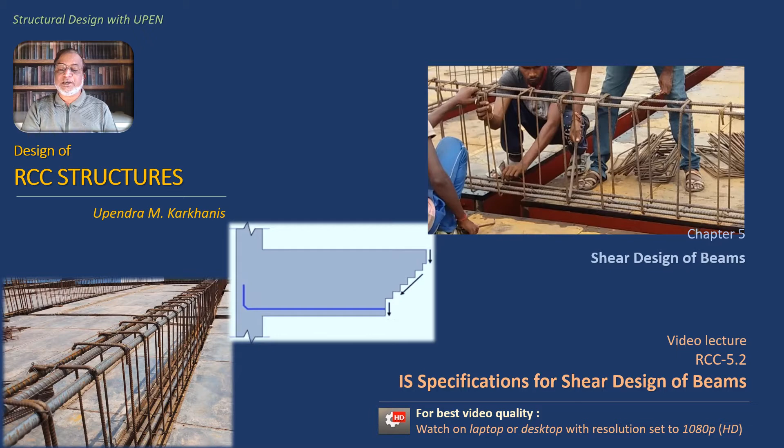The expected learning outcomes from this video lecture are: first, to check nominal shear stress for maximum shear stress; second, to state IS specifications regarding shear reinforcement.

The contents of this video lecture are: first, review of shear behavior of beams; second, critical section for shear; third, check for maximum shear stress; fourth, shear resistance of beams; fifth, reinforcement detailing and zones of shear stirrups.

We are going to use some key terms in this lecture: shear design, critical section for shear, nominal shear stress, maximum shear stress, shear resistance of beam, bent up bars, shear stirrups, minimum stirrups zone.

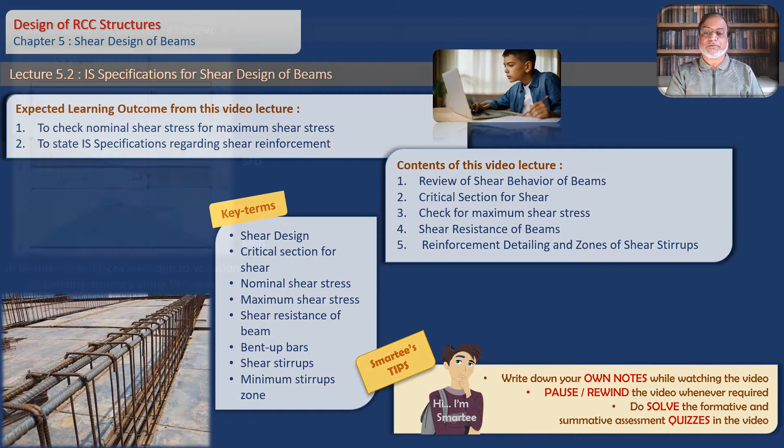Friends, in the earlier video we have already studied in detail the shear design of beams. In this slide, we will have a brief and quick review of the process of shear design of beams.

The first point is that in beams, shear forces arise due to variation in bending moment along the span. As seen in this diagram, there is a constant variation of bending moment, and that gives rise to the existence of shear force. We know that it is impossible to have a beam without a uniformly distributed load.

If we have a uniformly distributed load, we are bound to have variation in the bending moment along the span of the beam, because the beam has at least its own self weight, which is in the form of uniformly distributed load. It is not possible to get rid of the self weight, so it is not possible to have a beam without at least one uniformly distributed load.

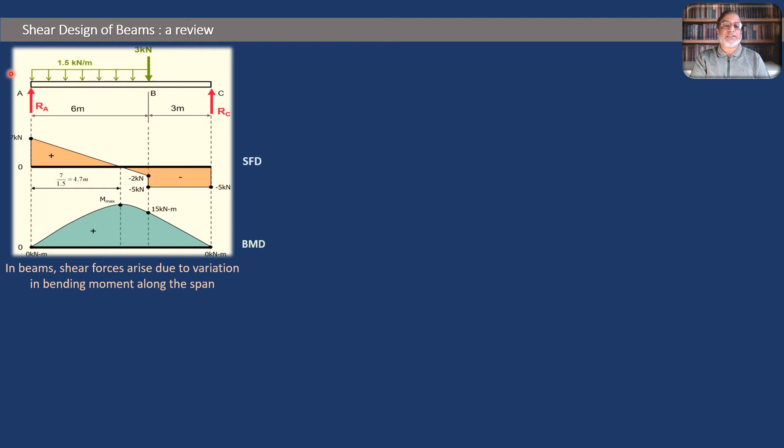This brings us to the fact that it is impossible to have a beam with pure bending. That means we must always be having some variation in bending, and that is why we will always have some shear force at every cross section. This makes it necessary to consider the behavior of beam in shear in greater detail.

Now we have seen in the last video that there is shear cracking, and we can divide the beam into three zones: 1, 2 and 3, and the shear cracking takes place differently in the three different zones. We know that the shear is critical or maximum near the supports. So zone 3 is critical for shear, just as zone 1 is critical for flexure.

So we have seen that at the support or near the support, we can get elements in pure shear as shown here. Element in pure shear means an element having no bending stresses, only shear stresses. Here the result of pure shear is that one diagonal is stretched, meaning we get tension along one diagonal of the element, as we get diagonal compression along the second diagonal. That is why the result of maximum or critical shear in the beam, usually at the supports, is that we get diagonal tension and diagonal compression in the member.

So here we see a picture of a real beam in which we see 45 degree inclined cracks arising from the support. So this was another point of review.

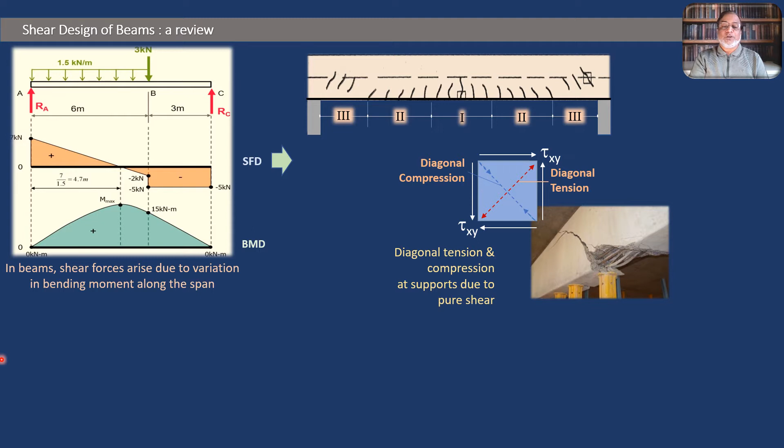Now we come to the fact of how to design a beam. So what is the meaning of design of a beam for shear? Here we make it explicit: design of beam for shear.

Shear design of beam involves making provision for shear resistance such that the shear resistance of the beam is more than the actual shear force, called design shear force VUD, developed at the critical section of the beam.

So what we are supposed to do is decide the critical section, the section at which the shear force is critical, and at that critical section we calculate the value of shear force that is called design shear force VUD.

So this VUD is calculated at the critical section, and in the process of design we are supposed to provide measures so that we develop a resistance in the beam equal to VUR. This VUR should be such that it is greater than VUD.

So if the resistance is greater than the actual shear force, we can say that the beam is safe in shear. So design of shear for beam is nothing but a handshake between the shear resistance VUR obtained from the design and the actual design shear force which is developed due to the loads.

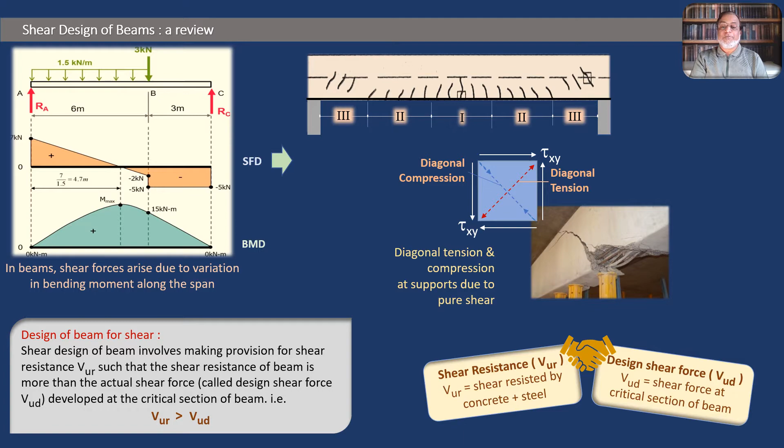Now the shear resistance of the beam will be derived from two factors or two sources: one is shear resisted by concrete, and second is shear resisted by steel. The greater detail of this fact will be studied further in this video.

Just as we saw in the previous slide, to design a beam for shear means to develop shear resistance in the beam, VUR, which is greater than the shear developed at the critical section, that is the design shear force. So first we have to know how much shear force is to be resisted. That value of shear force is the design shear force, VUD.

Now what is VUD? VUD is the shear force at the critical section. Here comes the concept of critical section. We know that in general shear force is maximum at the supports of the beam, so we should take the support shear directly as the critical section shear.

But IS 456-2000 gives us some allowances regarding deciding the design shear force. So the critical section may not always be this direct support section. Let us study in detail what the IS code says about the critical section.

Critical section for shear means the section in the beam at which the value of shear force is taken for design. That means you calculate the force VUD at a section called the critical section. The IS code further says when the reaction in the direction of applied shear introduces compression into the end region of the member, sections located at a distance less than D from the face of the support may be designed for the same shear as computed at distance D.

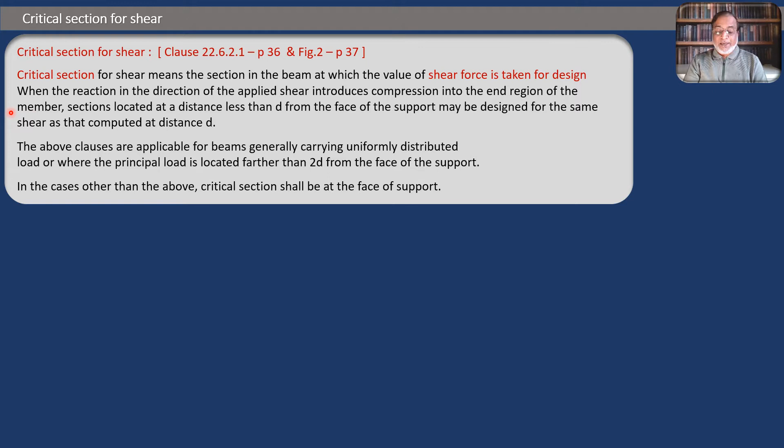Let us consider the situation here. This is a simply supported beam carrying UDL and having a column under the beam. Usually the columns will be under the beam; rarely they may be above the beam, but normally the columns will be under the beam.

Now in such a situation, the column is offering a reaction to the beam in the upward direction. This green arrow indicates the reaction of the column on the beam, whereas the load is pushing the beam downwards. So in this support region of the beam, we get compression induced only in this region.

As they said, the reaction in the direction of applied shear introduces compression into the end region. Here, this reaction is inducing compression in this zone near the end. When that is the situation, which is when the column is acting below the beam, the IS code says the shear VUD may be calculated at a distance D from the face of the column. So this red line is the critical section, located at a distance small d.

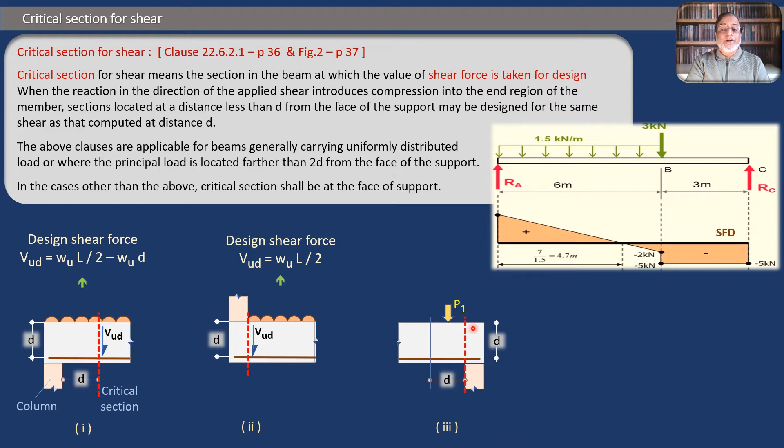UDL is absent. So IS code is saying if you are having a point load, say P1, and that load is acting at a distance within the effective depth D of the beam, then in that case IS code is saying you cannot take the critical section at a distance D. You have to take the critical section at the face of the column.

What is the IS code saying? Where principal load is located farther than 2D from the face of the support, so from the face of support, if the point load is away by more than twice the depth distance from the face of column, then only you can take the critical section at effective depth D. Otherwise you have to take it at the face of the column itself.

This situation is not a very common situation, but IS code has given a provision, that's why we are studying it. Now look here.

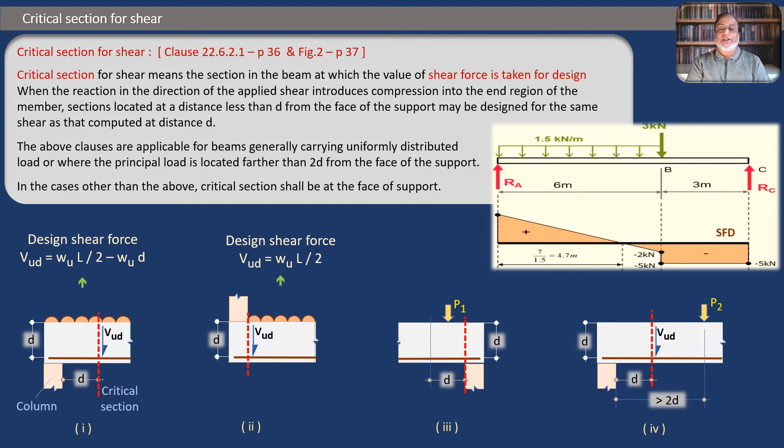Friends, in this slide we are going to discuss diagonal compression and check for tau C max. This is one more IS specification we are going to study, as part of our lecture series on IS specifications for shear design of beams. The first specification we saw was about the critical section and its location. Now the second specification is about the check for tau C max.

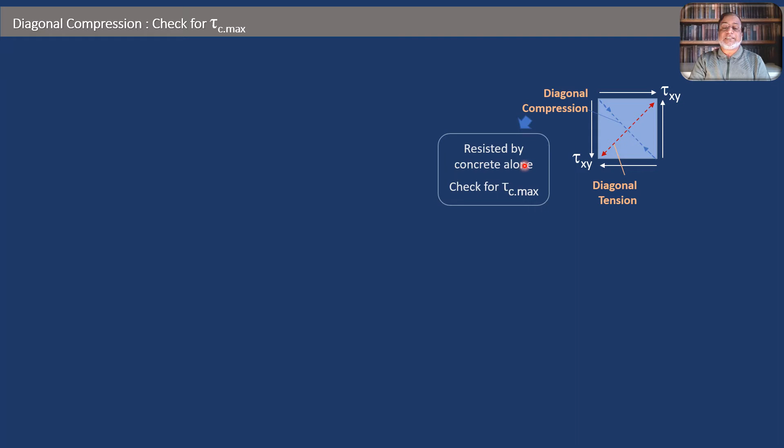We know this is the element in pure shear, the critical element we are talking about. So we have diagonal tension and diagonal compression. The question is how to resist these. The diagonal compression, shown by these blue inward arrows, will be resisted by concrete alone, since concrete is capable of taking compression.

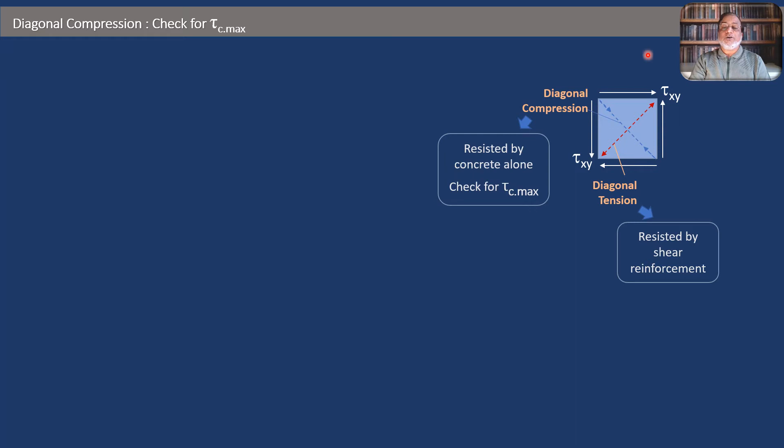But the IS code puts a condition on tau C max, which we will see now. The second thing is diagonal tension, which will be resisted by shear reinforcement, as we will see in the next slide. In this slide, we will see how diagonal compression is resisted by concrete and what this check for tau C max means.

This is the second important specification by IS code, clause 40.1 page 72 and table 20 page 73 of IS 456-2000: check for tau C max. Let us understand what this check is about. To take care of diagonal compression, we have to check that tau V is less than tau C max. Otherwise, we have to revise the design.

What is this check? When we get a problem and identify the critical section, as discussed earlier, we calculate the value of VUD - the shear force at the critical section using our usual methods of structural mechanics. After calculating VUD at the critical section, we calculate VUD upon BD, which we call tau V.

Tau stands for shear stress - remember, the symbol tau stands for shear stress. So we call this the nominal shear stress. We have to calculate the nominal shear stress, which is VUD upon BD.

So here we are reproducing table 20 of the code - maximum shear stress tau C max in Newton per mm square. If you look at this table, it's very simple. You have grades of concrete M15, 20, 25, 30, 35, 40 and above, and you get the values of tau C max. So simply look at the grade of concrete used in your problem - suppose you are using M25 grade concrete.

So if it is M25, you have to use this tau C max as 3.1 Newton per mm square. Just put that value and compare it with this tau V value, tau V and tau C max. Whatever value you get for tau V, if it is less than tau C max, then you can say your design is safe about diagonal compression.

Why is diagonal compression also critical? Because if the beam fails in diagonal compression, that failure is sudden. That is the greatest disadvantage. It is a sudden, brittle failure of concrete, and that is why IS code has put this condition that your maximum shear stress tau V should not be greater than this value, 3.1 for M25 and so on.

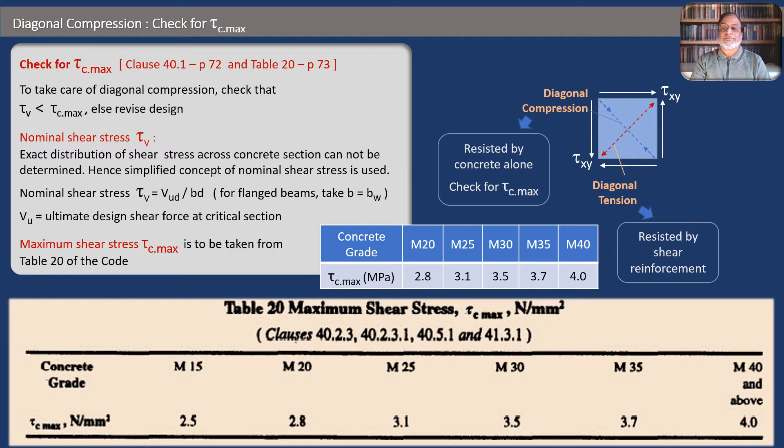Friends, in the previous slide we have seen how to calculate VUD, the design shear force at the critical section. As we have seen, the design for shear is nothing but a game between VUD versus VUR. Now in this slide we will understand the various ways in which we can develop shear resistance in a beam.

So the shear resistance of beam, we call it VUR. This is analogous to MUR, the moment of resistance in the flexural design of beam. We are continuing in a similar fashion. Now let us come to the sources of shear resistance of beam.

The shear resistance of beam can be derived from two materials, concrete and steel. So VUR, the shear resistance of beam, consists of concrete, which resists a shear force of VUC, and the shear reinforcement, which consists of two parts: shear stirrups and bent up bars. Stirrups will resist VUS and bent up bars will resist VUB, so that VUR equals VUC plus VUS plus VUB.

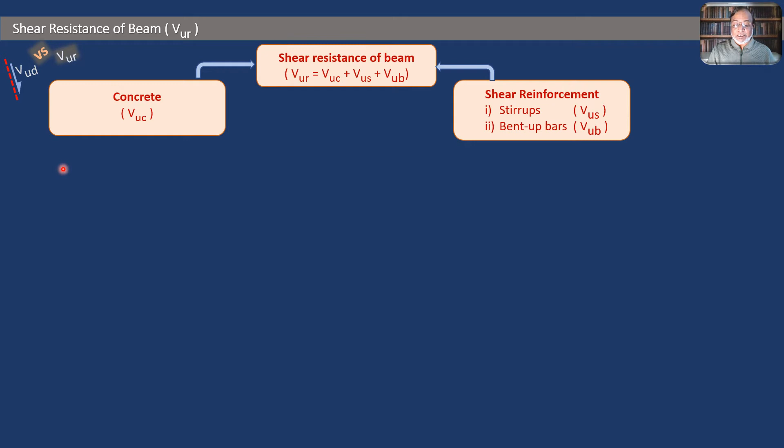Let us understand the concept of bent up bar in a little greater detail. We know that at the center of the beam, at the midspan, we design it for bending moment as the flexural design in case of a simply supported beam subjected to uniformly distributed load. So the midspan section, for example, has 3 bars of flexural steel. As we go from the midspan section to the support section, the bending moment goes on decreasing.

We know the bending moment diagram is parabolic and the bending moment is zero at the support, maximum at midspan. So we design the beam for bending moment at the midspan, where the steel required is, say, 3 bars. As we go from center to support, the bending moment reduces, and the same 3 bars will not be required. There will be a particular section where only 2 bars may be sufficient and 1 bar becomes redundant. From such a section, we can bend that extra bar up and continue it at the top at the support. So this becomes a bent up bar.

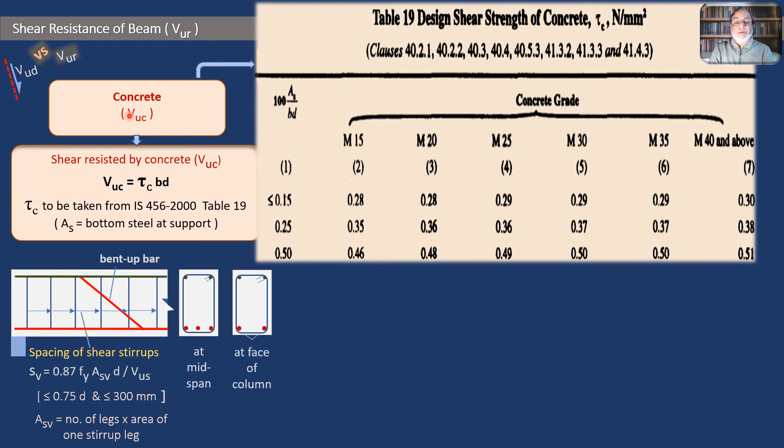Now we proceed for the calculation of shear resisted by the stirrups and the bent up bars. Before we proceed for the bent up bars, we will first consider the concept of minimum shear stirrups. The shear stirrups are provided here, and they will look like this.

The shear stirrups, these vertical rings, are called stirrups. They are made up of a single bar which starts like this, bends at 4 locations and bends back. These straight line portions are of 6 phi, where phi is the diameter of the stirrup bar, and this angle is supposed to be 135 degrees. These are some specifications related to the dimensioning and anatomy of the stirrup ring. Now we can say this is called a two-legged, one ring closed stirrup.

What is the meaning of two-legged? This vertical portion of the stirrup is called the leg of the stirrup, so this is leg 1, this is leg 2. So two-legged, one ring, single ring closed stirrup - this is the same which we have provided here. Now the same stirrup ring is looking at simple lines in this section.

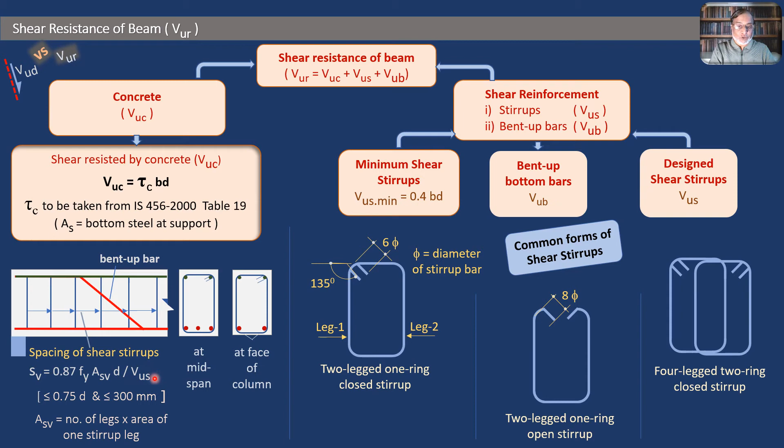So here we have understood how to calculate the spacing of the stirrups to resist a given value of ultimate shear force. Now we come to this concept of minimum shear stirrups.

As we have seen, this design for shear is just a game between VUD versus VUR. We are collecting shear resistance from the materials of the beam. Concrete has contributed by VUC. Now if you find that entire VUC is sufficient for this VUD, right?

It is possible that your VUD is say 100 kilonewton and your VUC is 120 kilonewton, for example. So this VUC itself may be enough to resist all the shear that you want to resist. So the game is over. In that case, what will happen? The question of these stirrups will not come at all, meaning this entire area, this entire source, will not be required to be used.

But IS code does not allow that. IS code says that even if you come across a situation where the concrete alone is sufficient to resist this entire VUD, you are not allowed to say that we will not provide any stirrups at all. IS code is saying that no beam in any condition will be without shear stirrups. You must provide some minimum shear stirrups.

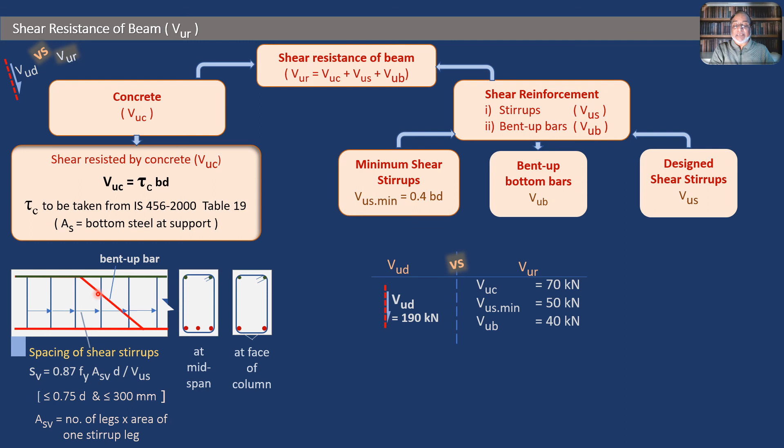Just remove these minimum stirrups and replace them by closer stirrups or more quantity of shear stirrups. These minimum stirrups are also stirrups. Only thing is, designed shear stirrups have closer spacing or more steel than the minimum shear stirrups. So these designed stirrups are used when minimum shear stirrups, that means minimum plus bent up bars plus concrete, are not enough to resist the shear, not sufficient.

That means your VUD, as you can see here, is greater than VUC plus VUS minimum plus VUB. We have taken a numerical example so that these things could be understood better. If this situation is there, we have to design shear stirrups for a closer spacing given by this formula, where VUS is to be taken as VUS equal to VUD minus VUC minus VUB, and that value, as we said, 80 kilonewton in this case, is to be considered.

So this is how the shear resistance is finally developed to meet the requirement of VUD, and the design of beam can be carried out like that. So in this slide we have seen the sources of shear resistance, and we have also indirectly seen how the design procedure of the shear design of beam goes.

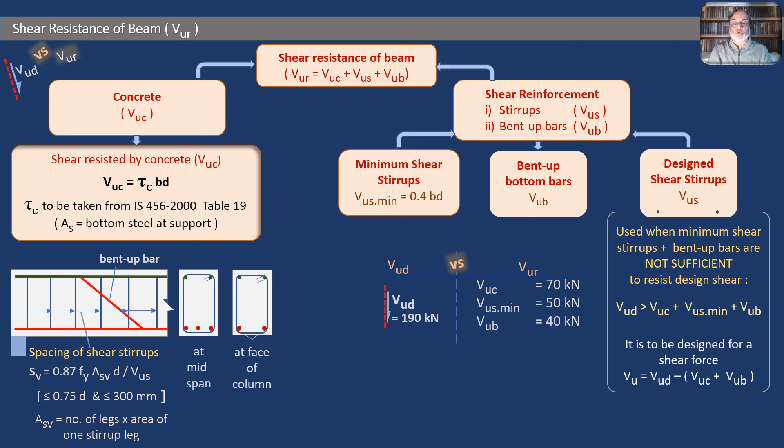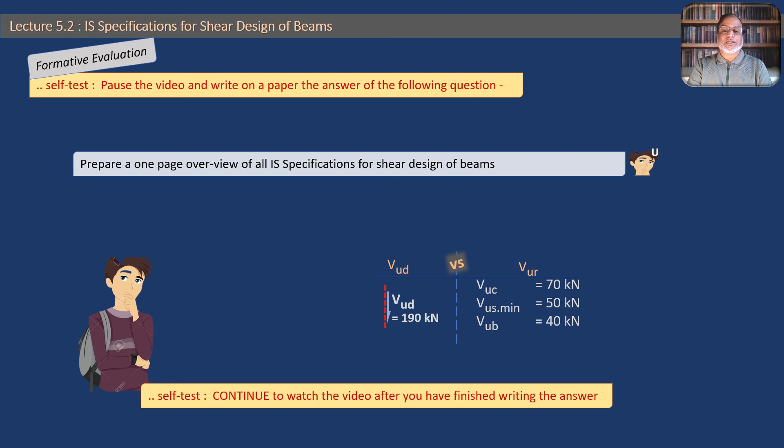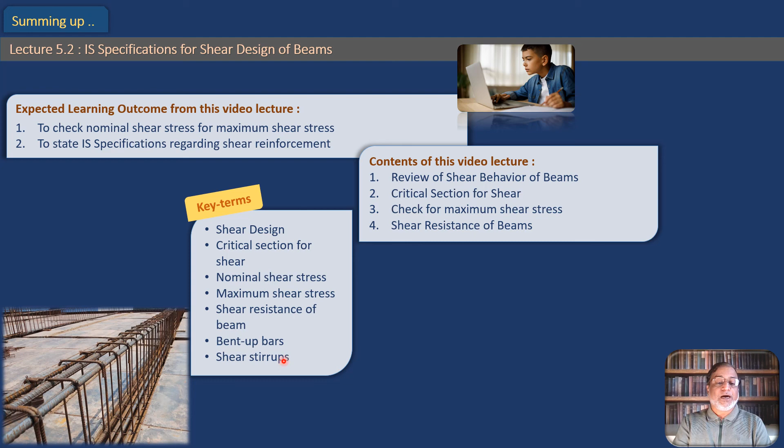The contents of this video lecture were a review of shear behavior of beams, critical section for shear, check for maximum shear stress, and fourth, shear resistance of beams. We used some key terms in this lecture: shear design, critical section for shear, nominal shear stress, maximum shear stress, shear resistance of beam, bent up bars, and shear stirrups.